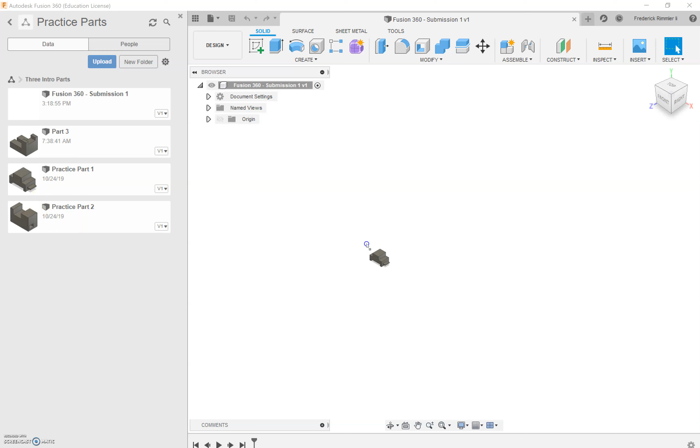But in the case of the 3 intro parts, we made them as separate design files. So the first thing I'm going to do is take a new design file and immediately save this as Fusion 360 Submission 1. Now I'm going to open up our data panel and the parts we want to submit, I'm just going to drag into our workstation. It doesn't matter if they overlap or look ugly. All we need is all 3 parts to be in the same design file.

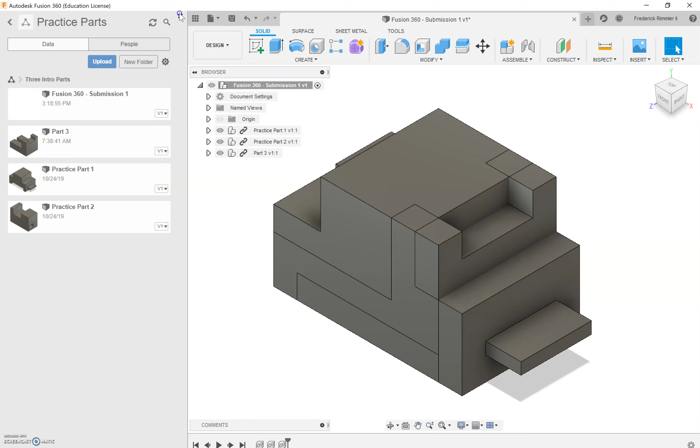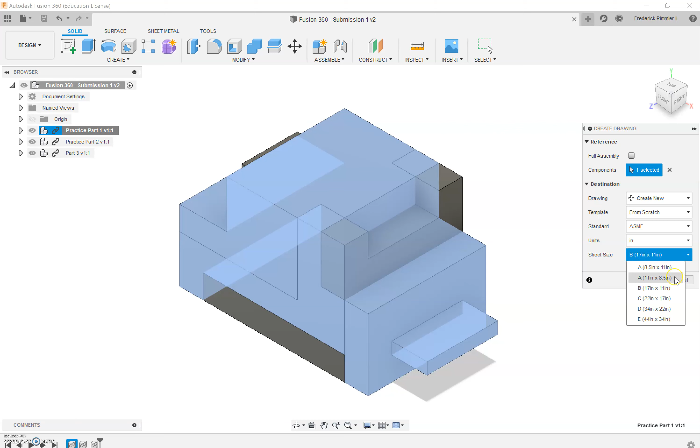Once we have that done, we can close our data panel. Now I'm going to right click on my first part and select Create Drawing. We want to create a new drawing, made from scratch, using ASME standards with inches as our units, and we can make it size A paper, 8.5 by 11.

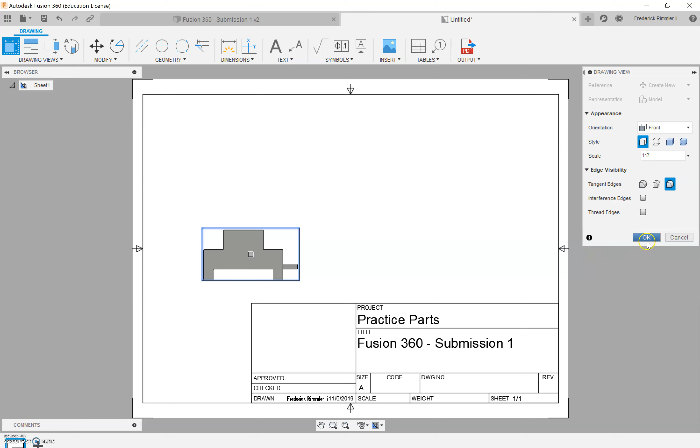That's a standard sheet of computer paper. We've got our drawing block down here, which includes who created it and when it was created. Over here, we've got our options for our base view. I'm going to change our scale, maybe from 1 to 4 to 1 to 2, just to make it a little bit bigger, and all I'm going to do is click to place our front view. I'll click OK, and now we have our front view.

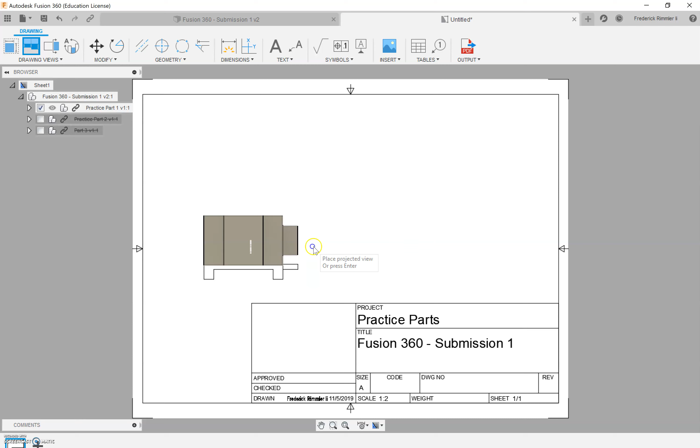We need to go through and add our projected views. You can either click this box that says projected view, or right click and go to projected view. Click our front view, then move my mouse over and click to the right, move my mouse straight up and click in the top, and move my mouse to the corner and click to make an isometric. When I'm done with my projected views, I can right click and select OK.

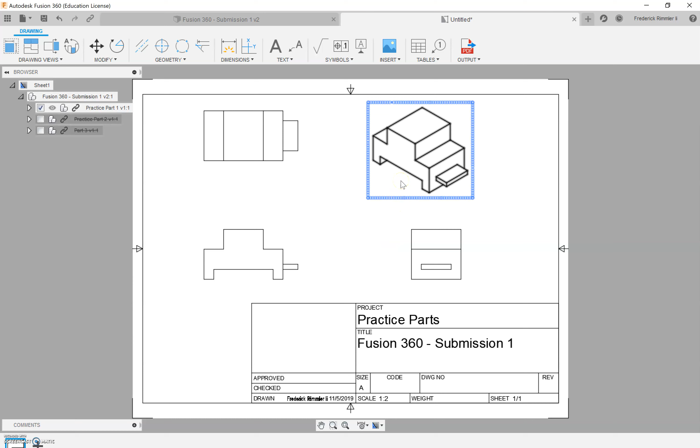The final thing we want to do with this drawing file is double click on our isometric view. That's going to pull up our appearance options, and I'm going to check this last box, shaded. That will color in and add some shadows to our isometric view and make it look nice. Now, if when placing your views they overlap or need to be moved, all you have to do is click on the view and a little dot will appear in the middle, which you can click to reposition the views as needed.

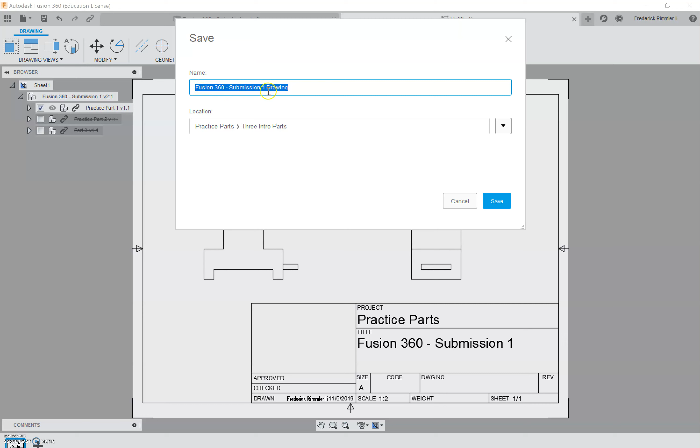Ours look good here, so I'm going to go ahead and save this file. Fusion 360 will automatically take the part file we created and make a drawing name out of it. I'll go ahead and hit save. Make sure you save this in your student number folder. Now, we want to add our next part.

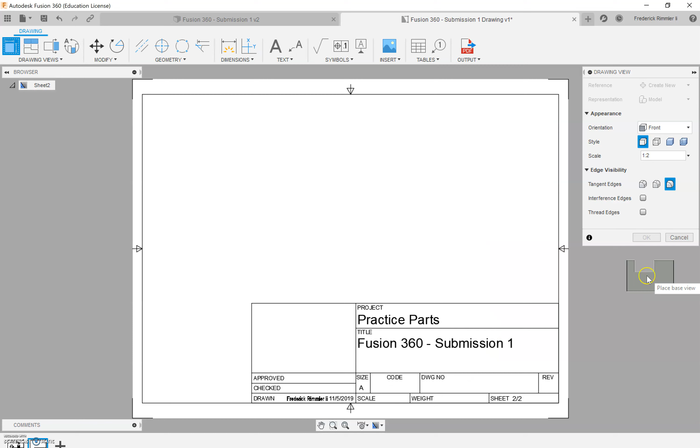If we were to go through that process again with part 2, we're going to run into a problem because it'll create it as its own separate drawing file. We want all of these to be together in one file. So for parts 2 and 3, I'm going to right click on the part in the browser, select Create Drawing, but instead of just hitting OK, I'm going to come up here where it says Destination Drawing. I'll click and pick that Fusion 360 Submission 1 drawing and click OK. Now it's making it inside of this drawing file.

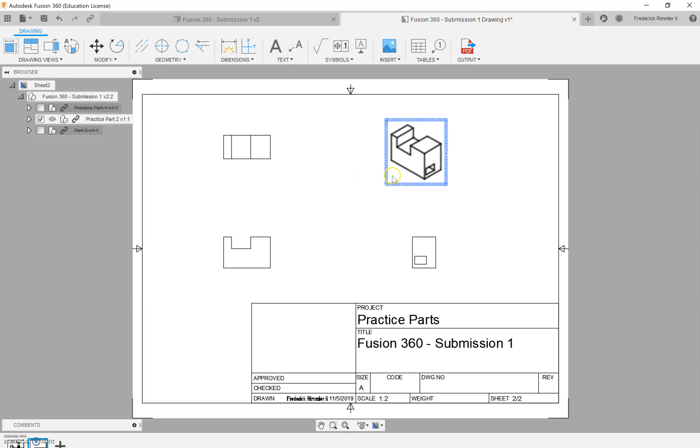I can go through, place my base view, click OK. I'm going to right click and go to Projected View, click my base, drag to the right, drag it straight up, and drag to the corner for an isometric. When I'm done, you can right click and select OK, or just hit enter. That works. Finally, I'll double click my isometric and make it shaded.

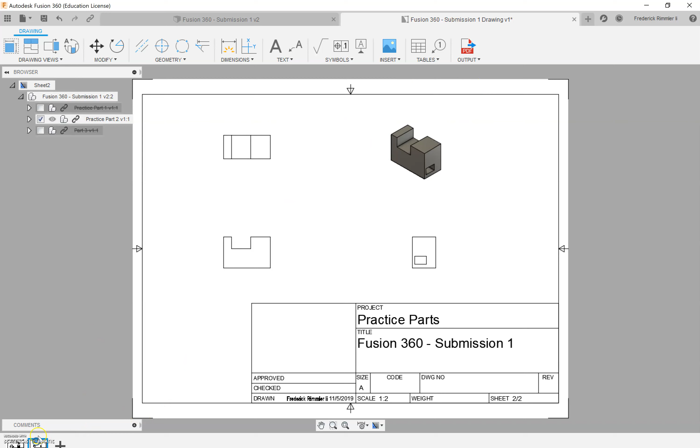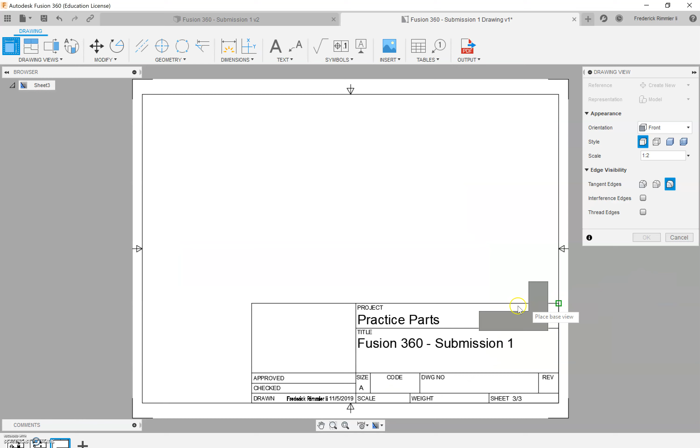If you look down here at the bottom of the screen, we now have multiple sheets in our drawing file. That's really what we're going for, creating one file that contains separate sheets for all of our parts. So I'm going to go back to our jumbled mess of parts, right click on part 3, create drawing. For destination, I'll do Fusion 360 Submission 1 Drawing. Click OK, and you can see it's added a third sheet down here to the bottom of our drawing file.

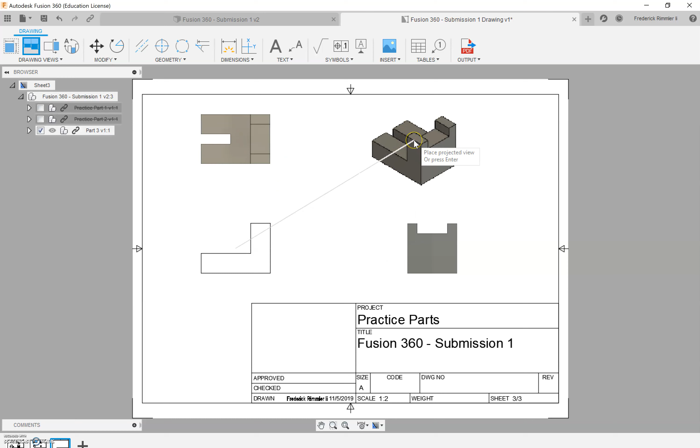Place my base view, right click for my projected views. I'll click and drag a view to the right, drag a view straight up, and drag a view to the corner. Right click, OK. Now, this isn't the best front view, this isn't the best isometric view. It's looking at it from the back.

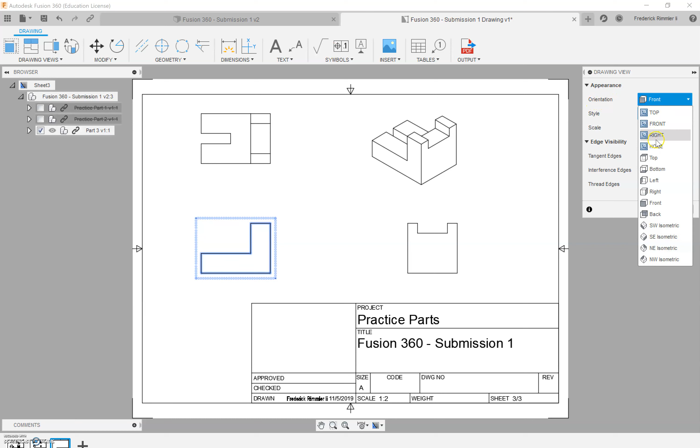So if we wanted to change that, all you have to do is double click on your base view, and here where it says orientation, you can click that drop down menu and look at different views. For me, this right view is going to be our best bet. I'll close that out, double click on my isometric, and make it shaded. Now we have all 3 intro parts created in the same drawing file.

It's time to go up here where it says Output PDF. I'm going to click that PDF, click OK. Make sure you navigate your way to your student number folder. So on this PC, double click on your student number, and you will save this document. For me, it already exists because I've made this multiple times. And we now have a PDF of our document. You can go to Canvas, find Fusion 360 Submission 1, and upload the file in Canvas to submit it.